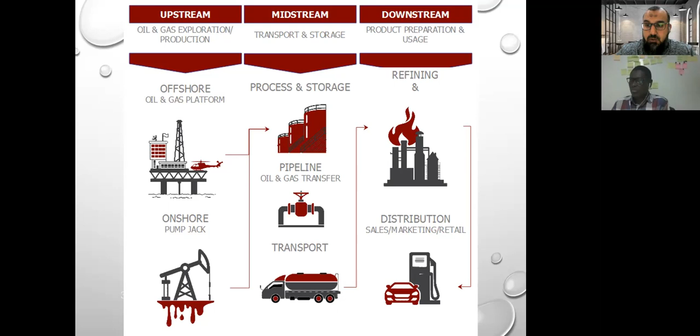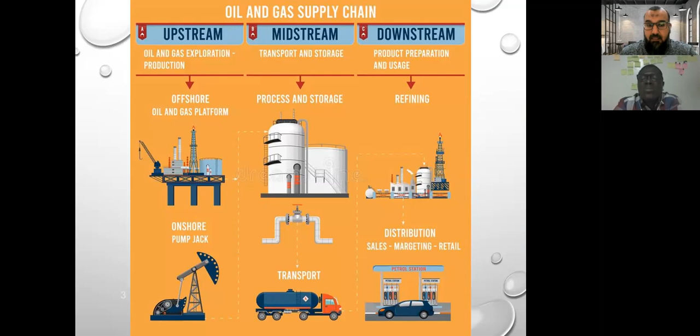Let's speak in details. This is another photo of the upstream, midstream, downstream difference. I am repeating again so that you will remember this comparison: upstream is oil and gas production and exploration, midstream is transportation and storage, downstream is usage and refining. I'm repeating myself so that everyone will remember the difference.

In upstream, we will speak today about the offshore platform and the onshore platform. Offshore, as I said, is on the sea. The onshore is on the land.

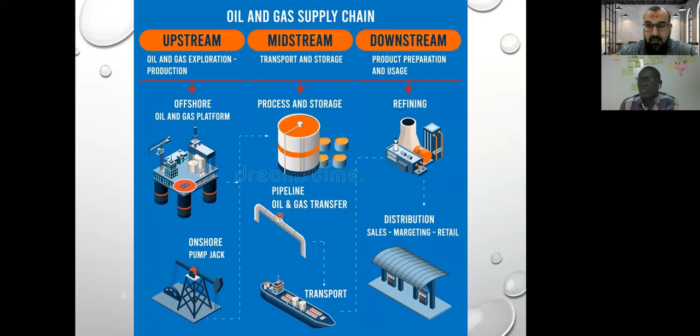So let's have some quick video. It will give you an idea about what I need to say about upstream, midstream, and downstream in oil and gas.

This is the Earth. It's really, really big. It has a total circumference of 40,000 kilometers at the equator, and a surface area of 510 million kilometers squared. And the vast majority of petroleum is found underground. So how on earth do we find it in order to extract it? Geologists can use a variety of different methods to locate oil even when it resides deep beneath the Earth's surface. The most common method of locating oil is via seismic survey. Essentially, geologists use a variety of different tools to emit sound waves, which then delve into the Earth's crust, some of which bounce back to the surface. A computer can then interpret these sound waves and create a detailed three-dimensional image of the various geological formations beneath the surface, thus providing the approximate location and amount of oil in any given oil reservoir.

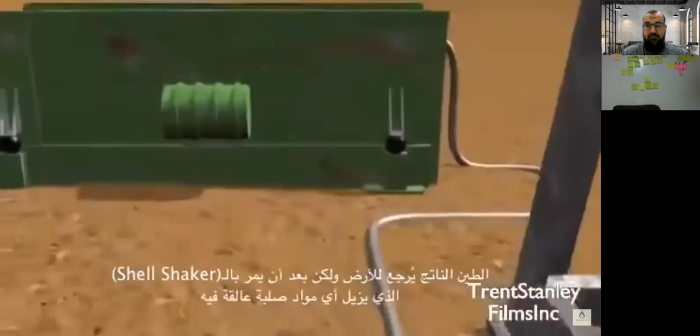As the drill bit plunges deep underground, drilling fluid is pumped down through the drill pipe to wash the rock cuttings out. The resulting mud returns to the surface and passes through a shale shaker, which removes any unwanted solids from the mud. The mud is then poured into a tank, where it is used as drilling fluid to

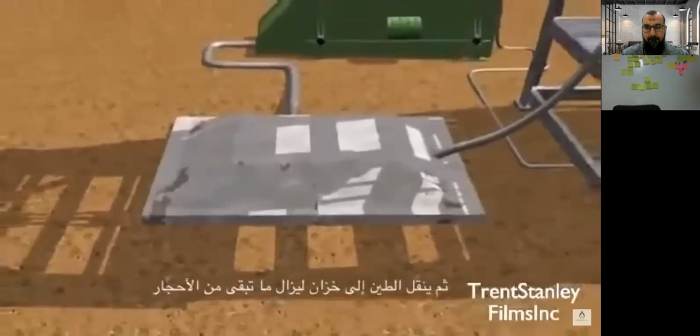remove further rock cuttings. Once the well has been drilled to sufficient depth, the walls are reinforced with concrete and steel casing, and then the drilling rig is deconstructed.

The next stage of the petroleum industry is production. In this stage, the oil is extracted from the reservoir. This is done with an oil rig. The rig's size and shape depend on...

So now I am still in the first section or sector, which is upstream. Please focus on this one. Alert, because the next step now - a video will illustrate the next step, which is upstream. Then the next step is midstream. Then the last step is downstream.

So now we are in upstream, which is onshore. This is onshore because on the land, the drilling unit has now explored the oil and started to produce oil. Now we start to produce oil from this drilling machine or drilling well. It will go to the next sector, which is midstream. Remember this. Then we will go to the downstream.

Where the oil reservoir is located, a pump jack is used. A motor turns two crank rods aided by counterweights, which are attached to a pitman arm, which is in turn attached to one end of what is known as the walking beam.

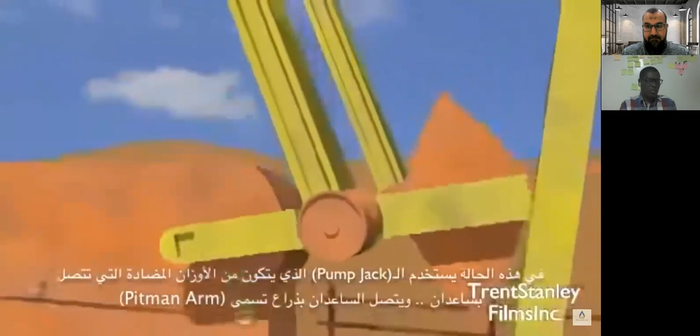The beam is centered on a pivotal point, and the circular momentum of the crank rods force it to rotate back and forth as it is pulled upon by the pitman arm.

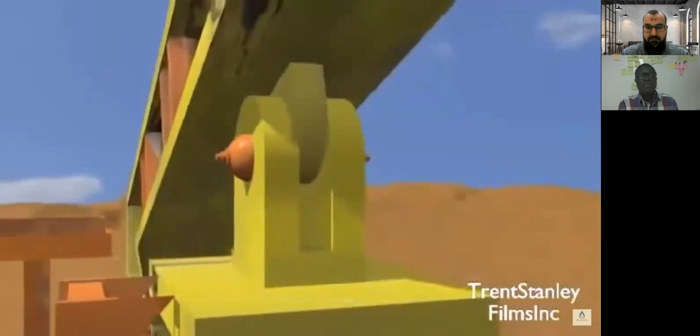Attached to the opposite end of the beam is the horse's head, and attached to that is the bridle. As the head travels up and down with the movement of the walking beam, it pulls on the bridle, which is attached to a polished rod.

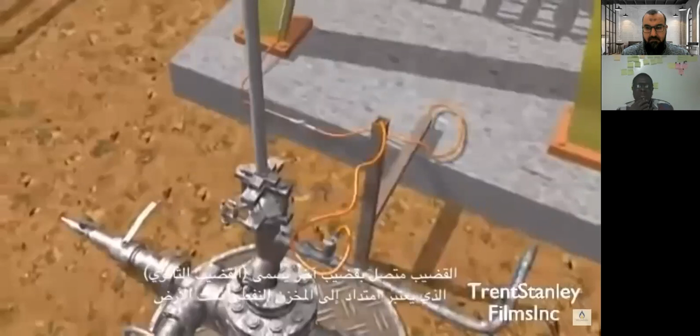The rod is attached to another rod known as the sucker rod, which extends all the way down into the oil reservoir. At the end of the sucker rod are two valves, the traveling valve and the standing valve. These valves pump the oil up out of the ground as they move up and down with the momentum of the sucker rod.

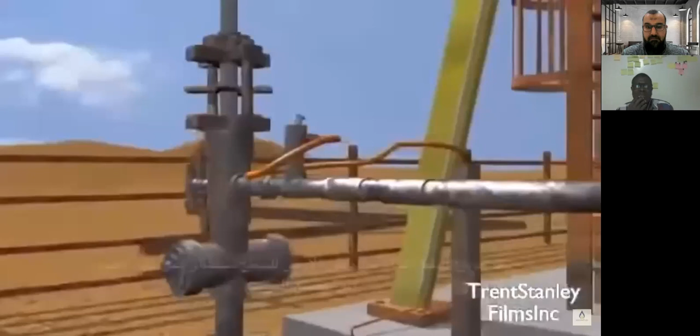Once the oil is drawn to the surface, it then travels along a small pipeline to a collection plant. This is the end of the third stage of the petroleum industry.

From the collection plant, the oil must be transported to a... So, listen, he said the oil must be transported.

Now we are in the transportation sector. Transportation, now we transfer to the next, which is midstream. We'll finish the upstream, we'll finish the exploration, we'll finish the production. They produce the oil now. They now need to start to transport the oil. So transportation is another sector, which is midstream. This is midstream. Look to this screen, to the video now. A refinery.

Midstream. The fourth stage of the petroleum industry is transportation. In this stage, the petroleum is transported from the production site. This can be done in several ways: by road, rail, sea, or pipeline.

Pipelines can be thousands of meters long and are typically made from steel with an average diameter of anywhere between 10 to 120 centimeters. The oil is kept in constant motion by regular pump stations along the pipeline and flows on average at speeds of up to 6 meters a second. The oil's final destination is the refinery, where the last stage of the petroleum industry takes place.

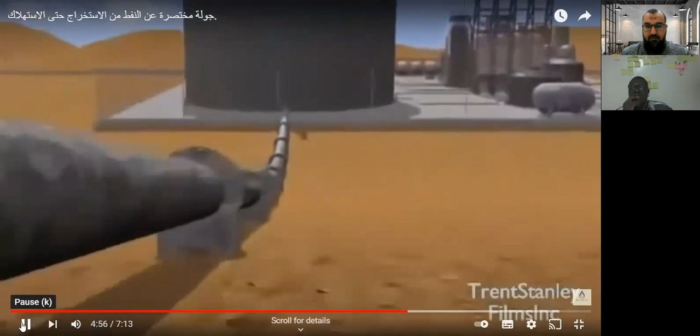So now we are going to the refinery. As he said in the video, the last stage of oil and gas extraction and production. So the last stage is refining. Refining is downstream. So this is the third sector. We start with upstream, production, exploration. Then we go to the midstream, which is transportation through this huge pipeline that you see in the video, including the pump station that needs to pump the oil to the destination.

What is the destination? Refining. Why do you need to refine? Because you need to produce some products. You need to have gasoline, you need to have benzene, you need to have kerosene, you need to have a lot of other products useful for our life, for our cars, for instance, to use gasoline or diesel or coke.

So all of these kinds of products are produced in the downstream sector, which we are now going to see in the video. This downstream video is about refining and industry and distribution as well.

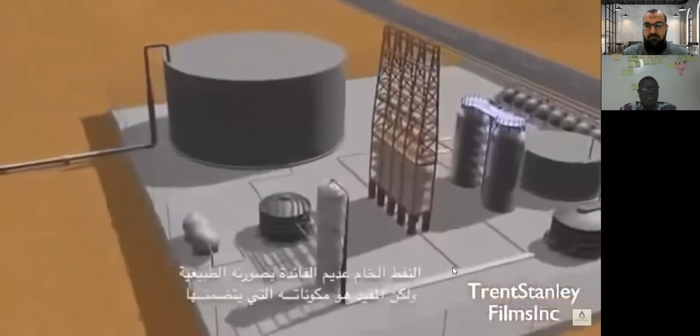The last stage of the petroleum industry is refining. Petroleum essentially is useless in its natural state. What's valuable and useful are the various components that make it up. These components all have different molecular weights and therefore have different boiling points. Petroleum companies take advantage of these different boiling points and use them in order to separate the different components.

In order to do this, the petroleum is first heated to temperatures as high as 600 degrees Celsius by pumping it through a furnace. The resulting petroleum gas is then piped into what is known as a fractionating tower, or distillation column. As the gas rises up through the tower, different components condense at different heights. A series of bubble caps then prevent the oil from falling down once it condenses.

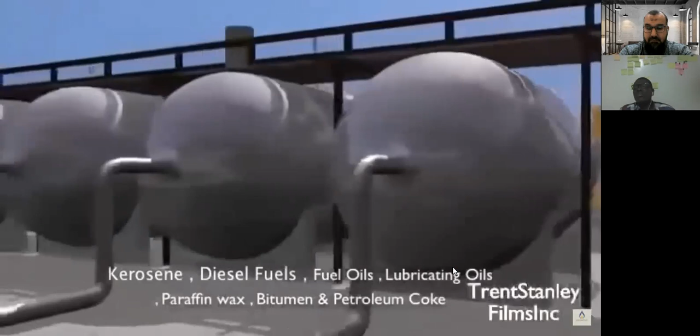The petroleum is then pumped out through pipes for further refining, such as the removal of sulfur in desulfurization units. Sometimes the heavier elements of petroleum are broken down into lighter, more useful components, using a coker or hydrocracker. The major products resulting from petroleum refining are liquid petroleum gas, gasoline, naphtha, kerosene, diesel fuels, fuel oils, lubricating oils, paraffin wax, bitumen, and petroleum coke. These products are then used in our everyday lives, such as powering our cars.

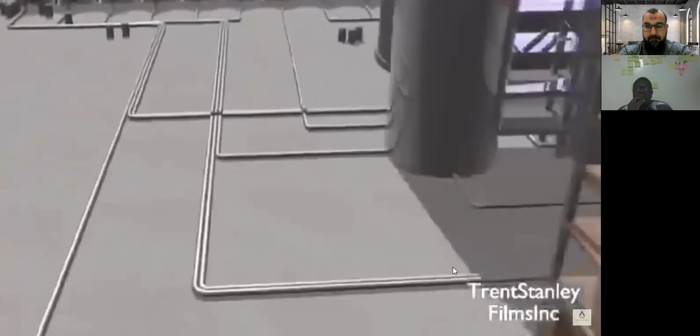Petroleum is a non-renewable resource, and so it will not last forever. It is estimated that the Earth...

So this is a small video to explain the difference between the upstream, which is mainly production and exploration, midstream, which is for transportation, and downstream, for refining and distribution. Now we will go back to the upstream sector for a more detailed explanation. As I said, the upstream has exploration and production.

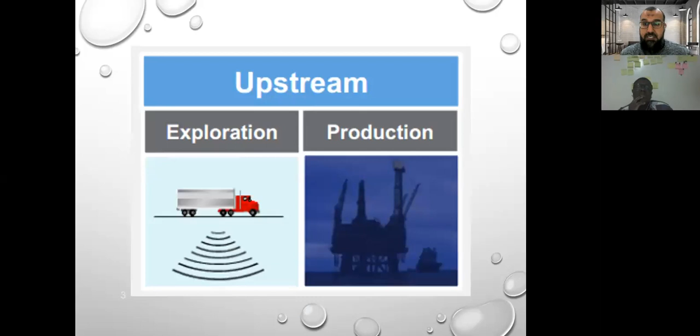In the exploration field, the people in the past used some simple features so that they could know whether there is oil in this area or not. They could notice some tar seeps or some marks from the gases in a certain location. So in the past, they noticed there is oil or gas there, so they started exploration. This is a very old method.

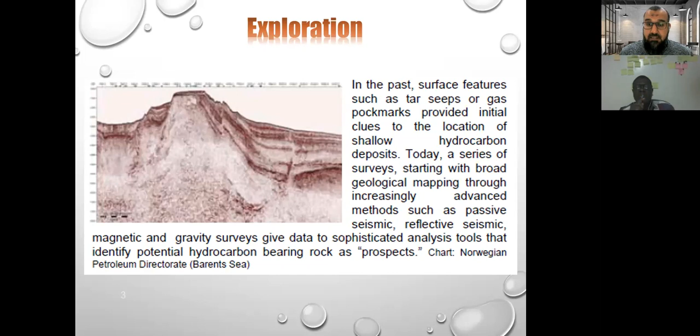However, nowadays, people with the new technology use something more advanced called seismic, or reflective seismic. What is this? It is like sounds from machines. They produce signals. Let's go to the next photo. It will give you more details about the seismic.

This is like a source of sound or signals. They produce this through air guns, and it goes directly to the deep area of the land or underneath the water to the seabed. Then the reflected sound waves will be transferred to 3D images. And this 3D image will give the geologists and all the people working in this field an idea about the condition of this area, the gas and oil, the amount of gas, and the possibility to explore in this area or not.

So this is a new technology. They use this seismic source to have signals reflected, then they transfer this to 3D images. They can then know if there is any gas or oil in this location before they start the exploration. All right.

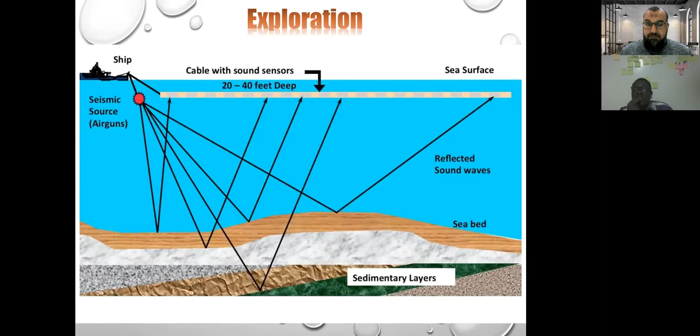Why do they need to do so? Because exploration actually costs a lot of money. Typically for offshore oil it costs about $30 million. So this is a really huge cost. Leases for the rig are typically about $200,000 on average, up to $700,000 per day. So this is too much cost. They need to lower this cost as much as they can, but that's mainly exploration. Exploration always costs them a lot of money.

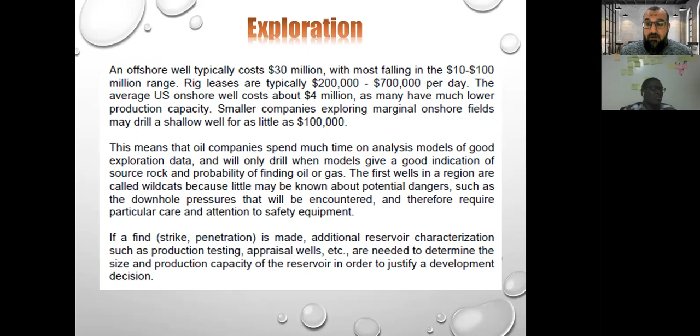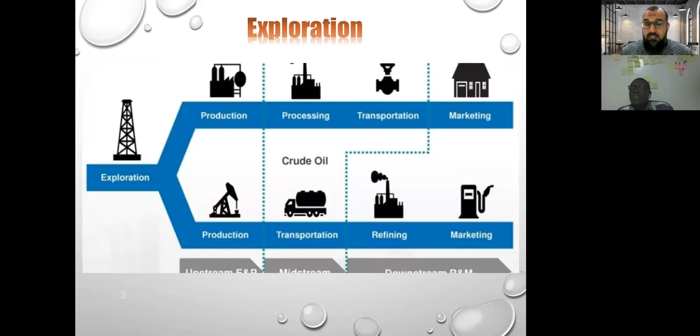That's why we know they need to do many times some analysis models of some good exploration data so that they can know exactly if there is any oil and gas in this area or not. For exploration, as I said, we have production either onshore or offshore. So for production, actually, we have many types of facilities or typical oil and gas production facilities.

We have, as I said, onshore, as it's shown in this photo. The first one is onshore. It is on the land, so it is an onshore facility for production. However, the others are offshore; from 2 to 7 are offshore platforms. And we have many types of offshore platforms. For example, the second one is a fixed offshore platform.

Number 3 is called offshore fixed self-contained platform. Number 4 is called offshore self-contained concrete gravity platform. Number 5 is called floating offshore, which requires some mooring, and this is more flexible for movement from one location to another. Number 6 is storage, shuttle or tanker. Number 7 is offshore floating tension leg platform.

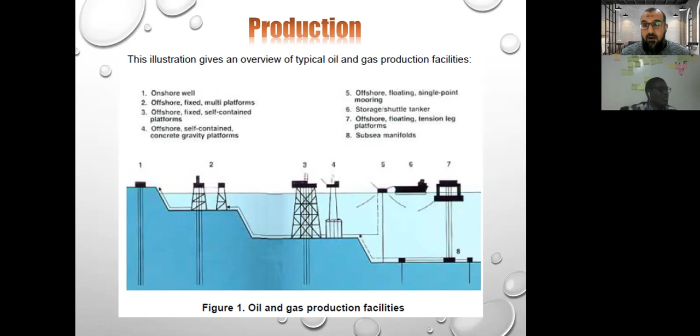And then number 8 is the subsea manifolds. These are mainly the common oil and gas production facilities, either onshore or offshore. This is also a simple diagram of the processing systems in most production facilities. In the first diagram here, you will find the production wellheads. This kind of symbol is a valve. Let me illustrate it by annotation so that you will understand where I'm speaking.

So here, this illustration is a valve, an open or closed valve. It means this is a group of valves. What I mean by valve is to open or close the flow. If it is open, the flow will pass. If it is closed, the flow will stop. Like the same valve in your house, in your kitchen, in your bathroom, or in the toilet.

When you open it, the water will flow. If you close it, the water will stop. This is the same methodology. This is the symbol of the valve. So in the production area, the first is the wellhead, a lot of groups of valve manifolds. They call it manifold. Why manifold? Because there are groups of valves. They call it manifold for testing and production.

Then the second stage in this production facility, they will go with some separation to separate the produced oil from unwanted material like water or gases. So there is some separator to separate the oil from water or from gases. So the gases go to this gas compression, from high pressure to medium pressure to other pressure, and the water goes to the next step. And also we'll have some symbology about the pump, like the water injection pump and gas compression injection system.

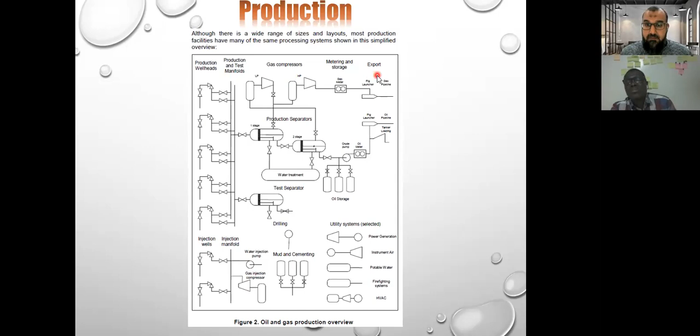So this is typically the plot diagram or flow diagram of the production facility, starting from production wellhead, testing manifold, gas compression, metering and storage, and then export. All right. So the next slide speaks in a little more detail about production. Then also, as I told, there is something called gas oil separation, which means GOSP. It is very common in production in the upstream area.

In the upstream field, you will find a lot of terminology called GOSP. This is a very common small facility like this, what you can see on the screen down. GOSP means gas oil separation plant. So this is to separate the gas and oil from what? To separate the gas and oil from each other. So you need to separate gas from oil. So you will go to this GOSP, gas oil separation plant, to separate the oil from the gases.

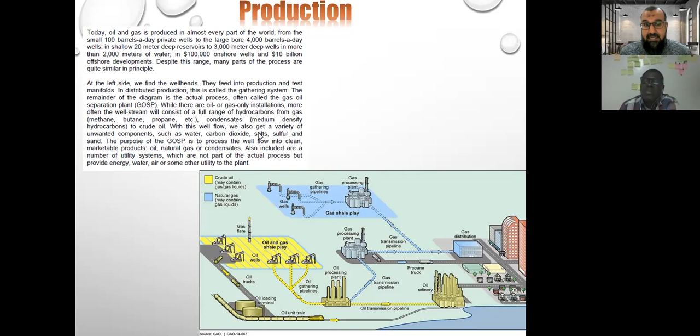This is again a big picture of the GOSP to separate gas from oil. And actually, this is mainly the gas processing plant, and this is the oil processing plant. The gas goes to the gas processing plant for further transport and processing, and the oil goes to the oil processing plant for further processing. So the oil will then immediately go to the oil refinery because it is pure oil, and the gas will normally go to gas distribution.

So the gas and oil are now separated. The oil is going to the oil refinery and the gas is going to gas distribution. And here all this is an onshore drilling well, and this is on the land, so it is onshore. If it is on the land, it is onshore, as we described.

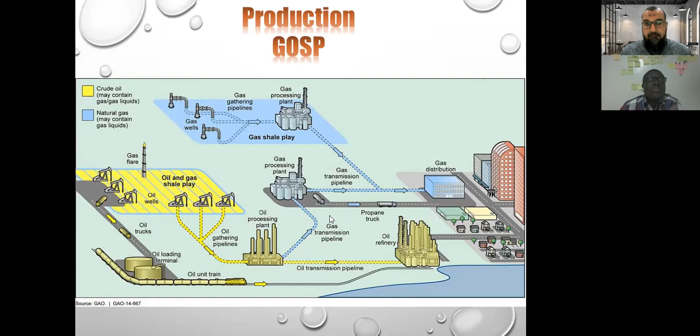Okay, now in the production, as I said, we have onshore and we have offshore. The onshore, as I said, is on the land, so any manifold or any facility or any area or any oil being explored on the land, they put the facility on the land, they put the rig on the land, they start the exploration and production on the land. So they call it what? They call it onshore because they started on the land.

And this is all kind of oil rig. You see here, let me also have annotation to be more clear. You see, this is oil rig. This is oil rig, this is oil rig, and this is oil produced well here. This is well. So this oil rig and this oil rig, all of them are onshore.

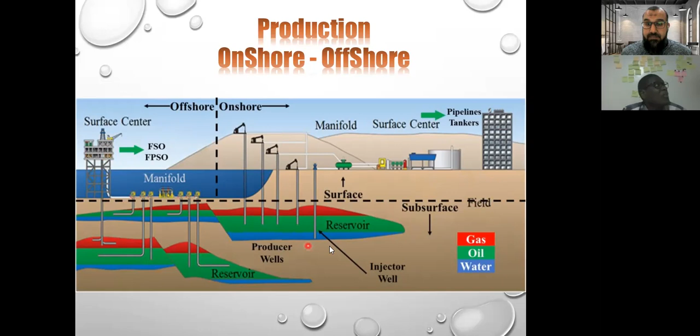Now let's have some idea about the onshore plants. This is the onshore drilling unit. Onshore means it is on the land. We are seeing now land. So actually this onshore production is economically viable from a few dozen barrels of oil a day and upward. Oil and gas is produced from several million wells worldwide. So the gathering network can become very large, the production from thousands of wells, several hundred miles apart, feeding through a gathering network into a processing plant.

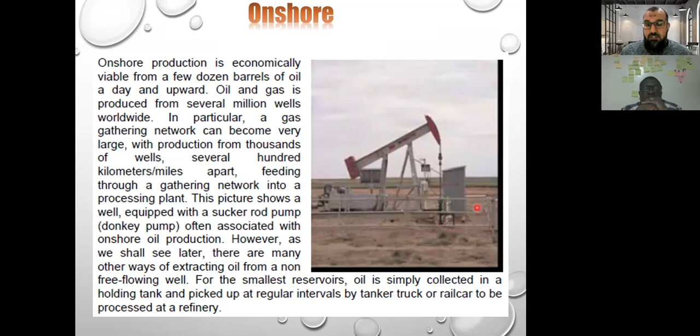So this picture that you can see on the right screen shows a well equipped with a sucker rod pump. There is a pump there, and it's called a donkey pump, often associated with onshore oil production. So this is onshore oil production.

So in some unconventional areas, you will find some very heavy crude and tar sands. This is very heavy, so it's not easy to extract heavy crude and tar sands. So it becomes economically higher in cost, and it costs the drilling companies more to extract the heavy crude. Because the heavy crude is heavy in its material. It's not light, it's not sweet, so it is very heavy. It requires a lot of heating to be extracted.

The same for the tar sands, which have lost their volatile components and are strip-mined or can be extracted with steam. So a lot of methods are used, and this depends on the hydrocarbon components in the crude oil.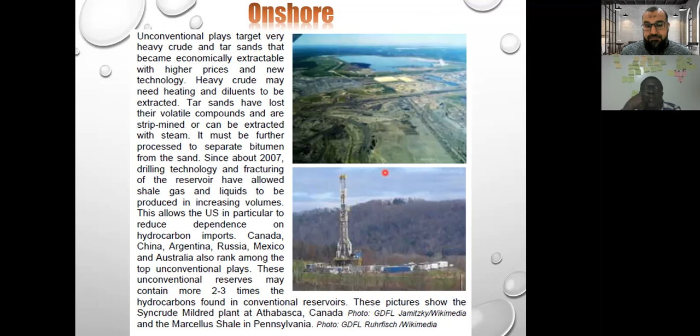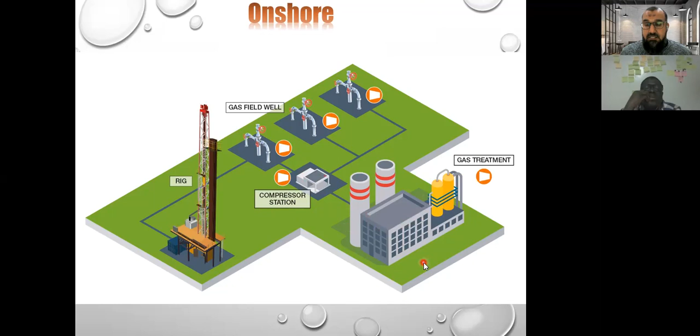Okay. What about offshore? As I spoke, we have onshore, then we have offshore. The offshore is actually any oil and gas facility which is on the sea, not on the land. It is on the sea. So we have very different platforms and very different areas of platforms or common offshore structures.

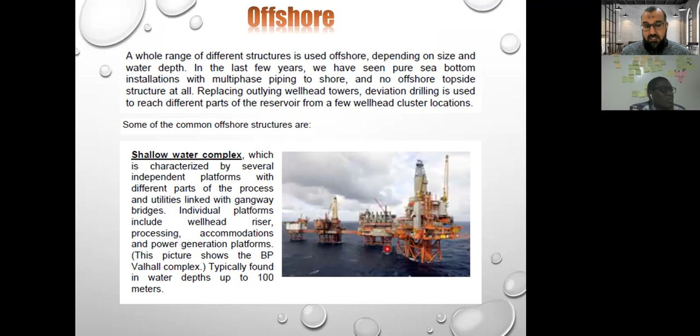This is actually not in the shallow water. It's deeper. It can reach 500-meter depth. There is also another type of platform. It's called compliant towers. It's mainly like the fixed type of platform, but they have some concrete foundation. So this is to extend the platform upward. But this kind of tower is flexible, unlike the rigid legs of fixed platform.

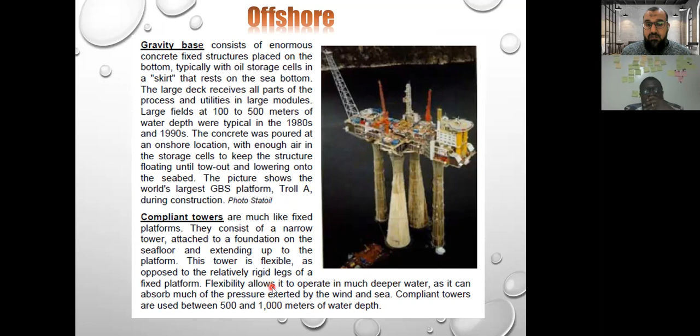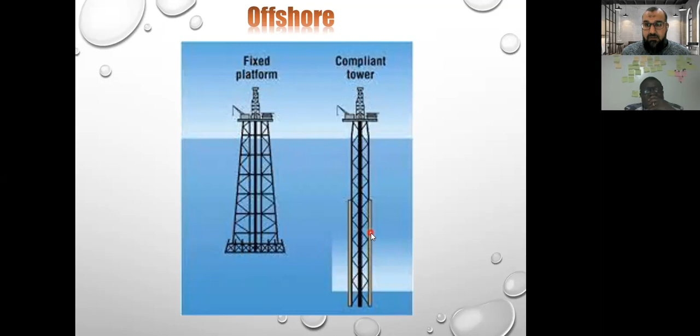So let's see a photo of this compliant tower. This is a compliant tower. It's actually going deeper than the fixed platform. The fixed platform can reach up to 500-meter depth. However, the compliant tower goes deeper inside the water. If the sea becomes more deep, then you need to go not with a fixed platform, you need to go with floating production. This floating production is not fixed, it can float, so it will require deep water.

The common terminology of this floating production, they call it FPSO. This is very common in offshore. They call it what? FPSO. Floating production, storage, and offloading. The main advantage of this floating structure is that it is standalone. Standalone structures don't really need any external infrastructure like pipelines or storage. The crude oil is then offloaded to a shuttle tanker, and this shuttle tanker can transport the crude oil to another area, depending on the production.

These FPSOs currently produce around 10,000 to 200,000 barrels per day. Barrels is the unit of the volume of the oil. So they can produce up to 200,000 barrels per day. This is typically a tanker type. So remember that if the sea depth increases and it becomes deeper, then it is better to use a floating type platform for the offshore wells.

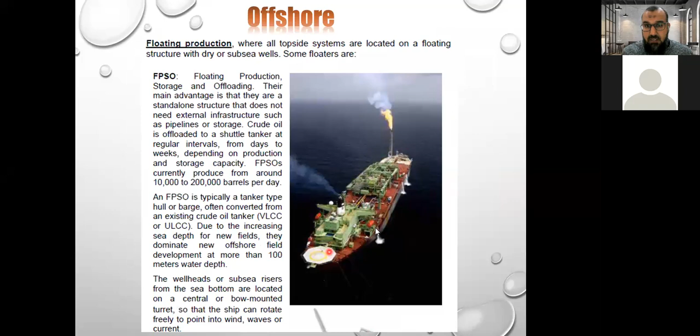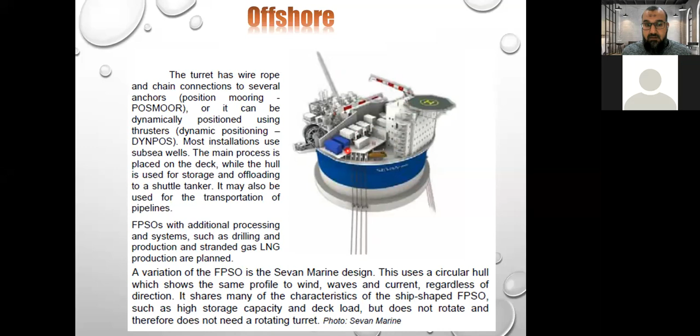Here, this is underneath the floating rig. The turret has wire rope and chain connection to several anchors. This allows dynamic positioning and mooring. They can be flexible. It can move and rotate. So imagine this structure is underneath this huge FPSO tanker, with mooring and dynamic positioning. For what? For easy movement, turning, and relocation to another location.

We have also another type of platform. They call it the tension leg platform. This actually reaches depths of about 2,000 meters, the depth of the seabed under sea level. So the depth of the sea here reaches 2,000 meters, 2 kilometers actually. It is very deep. So they use this kind of structure in very deep water. They call it tension leg platform.

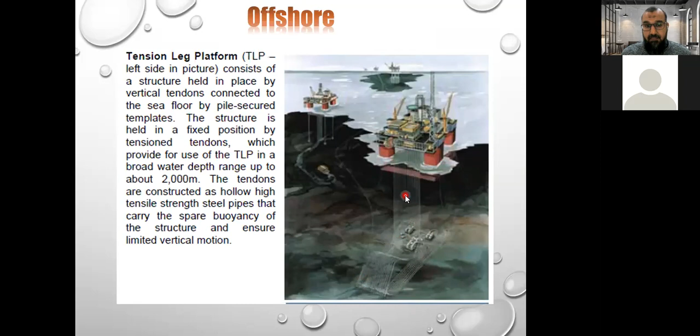The other type, they call it semi-submersible platform. This kind of offshore platform is actually a similar design, but without what? Without mooring. This permits more lateral and vertical motions. So they can move vertically, they can move laterally as well. So they have this kind of flexibility to go up and down. Depends on what? Depends on the sea current and the winds. So they can go up and down, and it depends on the well also. If the well requires it, they can have this kind of flexibility.

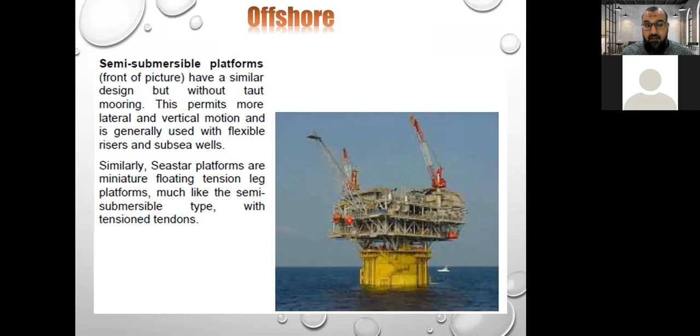The other type is called spar. This is the spar platform. It consists of a single tall floating cylinder, supporting a fixed deck, and this cylinder doesn't extend all the way to the seabed. So this is also required in deep water. It reaches to 3,000 meters depth of water.

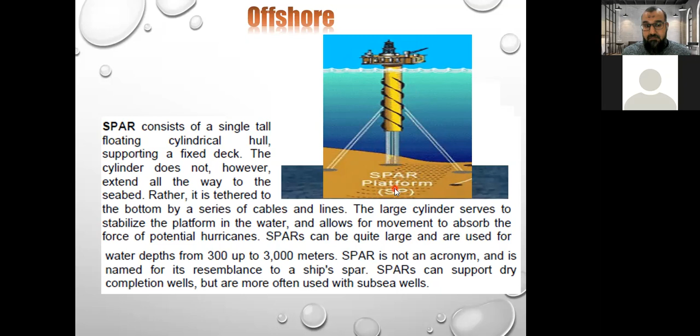Other facilities or systems offshore we call subsea production systems. These subsea production systems are mainly for wells located on the seafloor, as opposed to the surface. So in the floating production system, when we need to extract petroleum from the seabed, we need to have many production systems on the subsea. And for transportation purposes, if you want to extract oil and transport it to another location, you have to have some undersea pipelines and risers.

This is the undersea pipeline. Undersea pipeline for what? For gas transportation, to transport gas from one location to another. So this gives some flexibility to the system, so that when the platform is on the sea, they have some other subsea system which consists of pipeline, as you see here, and structures, connected together to transport these extracted gases from one platform to another, or to another facility or another plant for more processing.

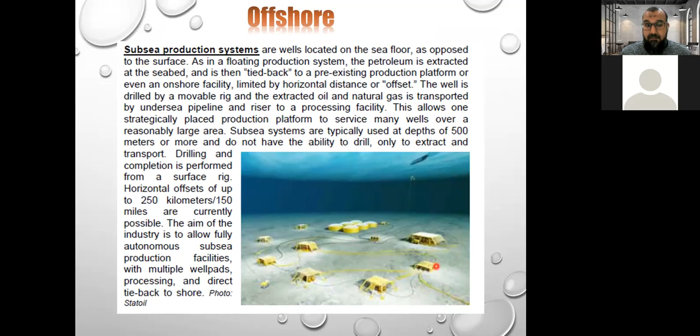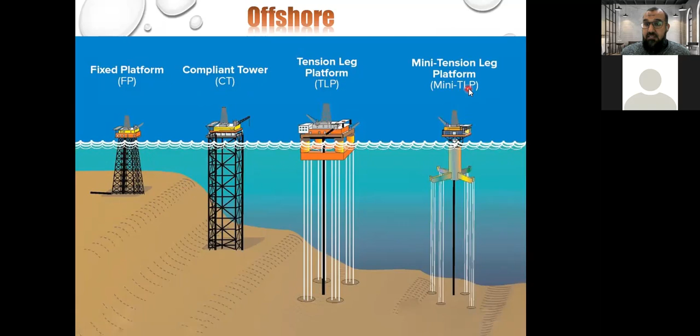This is a comparison between the different types of offshore platform. Fixed platform, as you see here, is mainly in shallow water. So the depth of water here is not very deep. If you go deeper, you need a different type of offshore platform. If you go deeper, you need this kind of compliant tower first. Then if you go deeper, you will use a tension leg platform. If you go even deeper, you use a mini tension leg platform, like this type.

Then if you go deeper, you will use a semi-submersible platform. This can reach up to 2,000 meters, and also up to 3,000 meters. For deep water, you can also use a spar platform. As I said, you can use a floating production system. You can use a floating FPSO with a shuttle tanker. You have the shuttle tanker, and the FPSO, floating production storage and offloading. You can use this in deeper water.

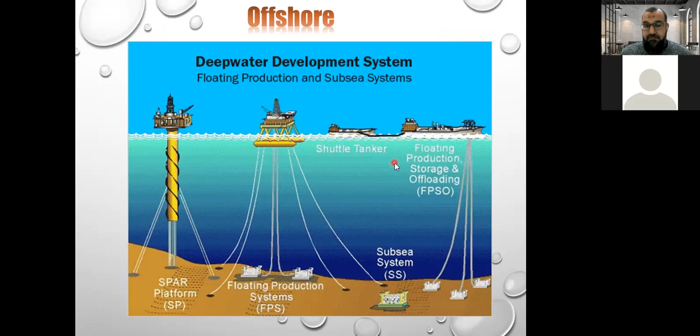Let's see a video that can explain more details about this.

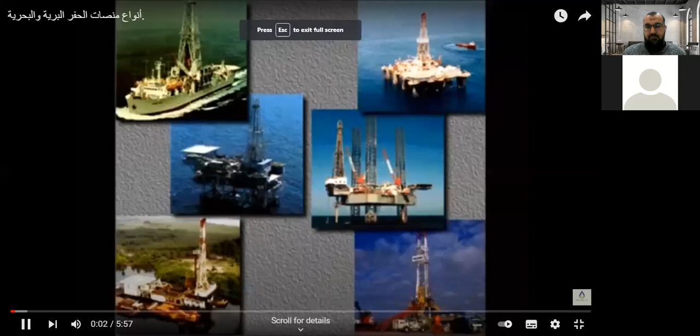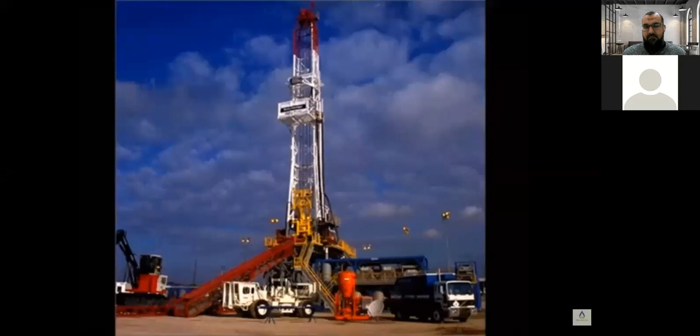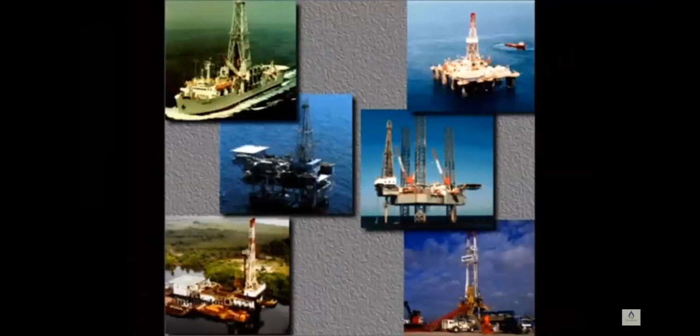Drilling rigs like these bore or drill holes into the earth. They work both on land and offshore. Some are big and some are relatively small. Big rigs drill very deep holes, 20,000 feet, 6,000 meters or more. Small rigs may only drill to a few thousand feet or meters. People in the oil industry group rigs into 6 basic types: land, jackup, platform, submersible, semi-submersible, and drill ship.

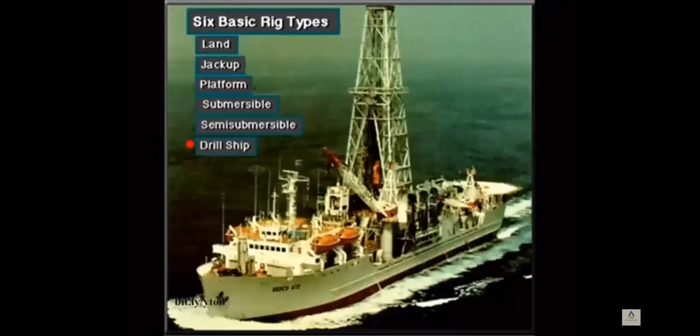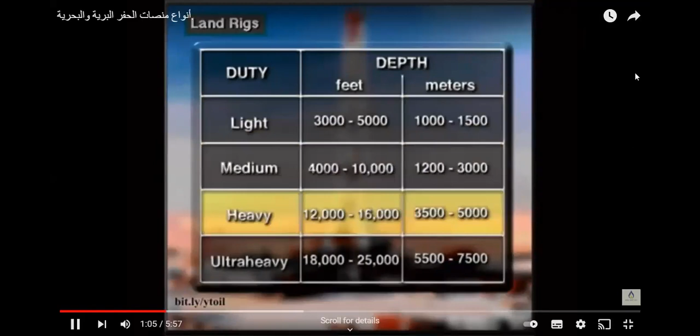A land rig drills on dry land. They're the most common rig. Light-duty rigs drill holes from about 3,000 to 5,000 feet deep, or 1,000 to 1,500 meters. Medium-duty rigs drill to depths ranging from about 4,000 to 10,000 feet, or 1,200 to 3,000 meters. Heavy-duty rigs drill holes from about 12,000 to 16,000 feet deep, or 3,500 to 5,000 meters. Ultra-heavy-duty rigs drill holes from about 18,000 to 25,000 feet or more, 5,500 to 7,500 meters or more.

Crew members can move land rigs on trucks, tractors, trailers, barges, helicopters, heavy rolling gear, skids, and, in rare cases, specialized air-pressurized equipment. Small, light-duty rigs are pretty simple to move. Ultra-heavy land rigs can be difficult to move.

A jackup rig drills offshore wells. It has legs that support a deck and hull. When positioned over the drilling site, the bottom of the legs rest on the seafloor. Jackup rigs can drill in water depths ranging from a few feet or meters up to more than 400 feet, over 120 meters.

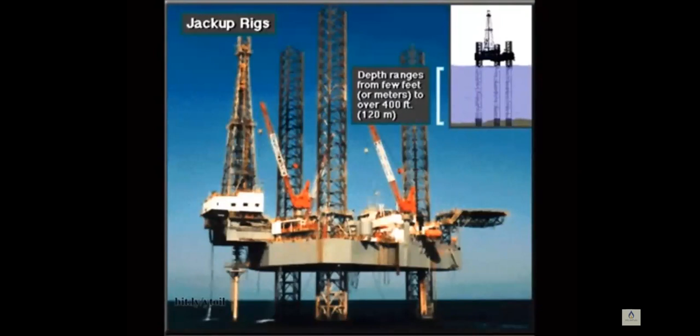Boats tow a jackup rig to a location with its legs up. Once the rig-up crew gets the legs firmly positioned on the bottom of the ocean, they can adjust and level the deck and hull height.

A platform rig is an immobile offshore structure. That is, once built, it never moves from the drill site. Companies drill several wells from the platform.

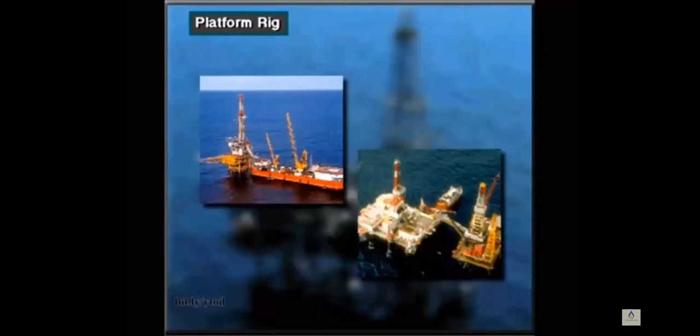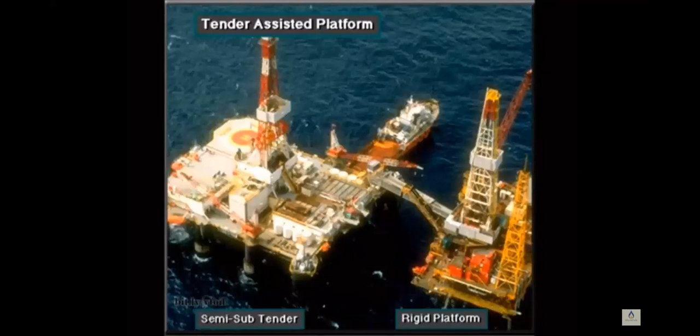Platform rigs can be tender-assisted rigs. The tender floats next to the rigid platform, which is firmly pinned to the seafloor. Many platform rigs do not have a tender. They are so large that they are self-contained.

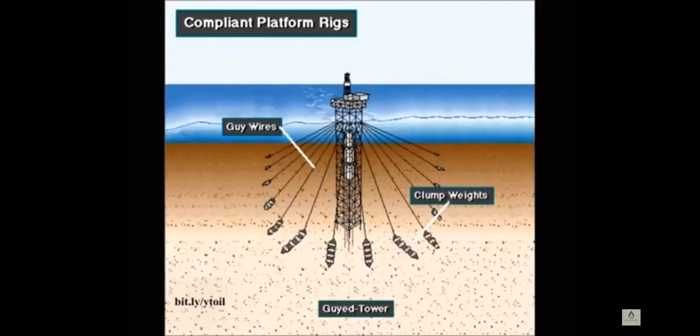Big platform rigs include the steel jacket platform, the caisson type, and the concrete gravity type. In deep water, rig builders have to make platforms that yield to water and wind movements. Two compliant platform rigs are the guyed tower and the tension leg.

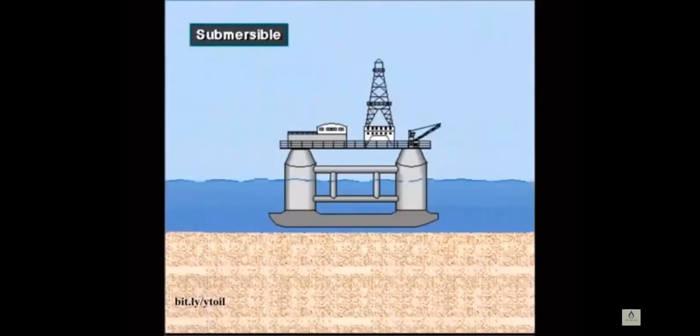A submersible rig rests on the seafloor when it is drilling. Workers flood compartments that cause the rig to submerge and rest on the bottom. When ready to move, workers remove the water from the compartments. This makes the rig float. Boats can then tow the rig to the next site.

Rig builders design submersibles to drill in shallow water and in water up to about 175 feet deep, a little over 50 meters. Submersible drilling rigs include the posted barge submersible, bottle-type submersible, and the Arctic submersible.

A semi-submersible rig is a floating offshore drilling rig. It has pontoons and columns. When flooded with water, the pontoons cause the unit to partially submerge to a predetermined depth. The working equipment is assembled on deck.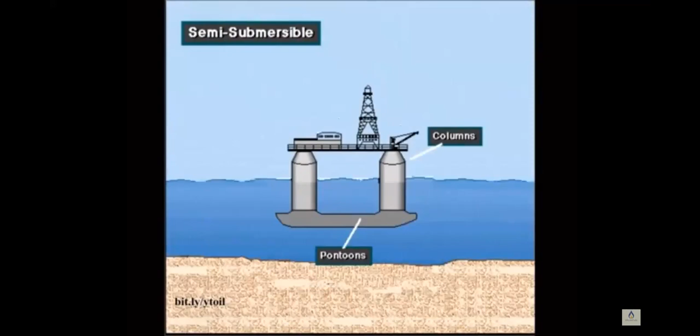On the drill site, workers can either anchor the rig to the seafloor or use a system of thrusters and positioners to keep the rig over the hole. Here, they have it anchored. Crew members mount the wellhead and blowout preventers on the ocean floor. Special hollow pipe, called riser pipe, connects the top of the blowout preventer to the rig.

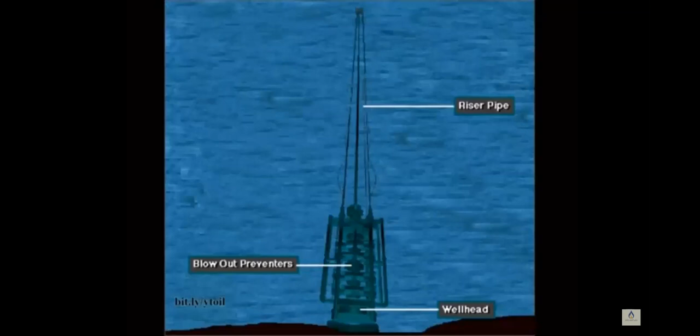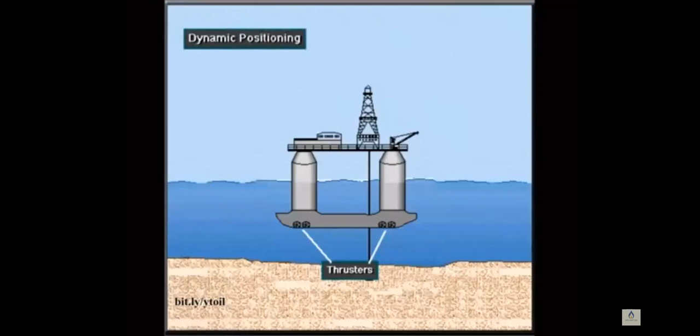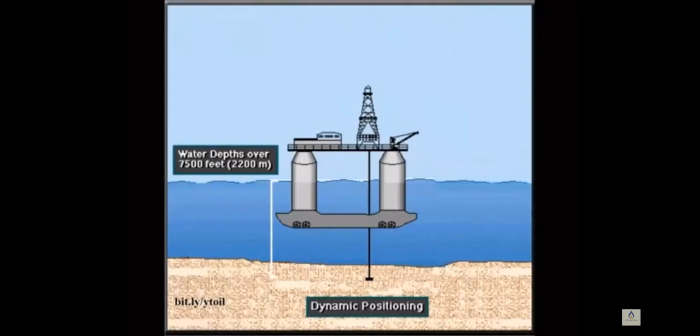In some cases, the crew uses thrusters to keep the rig over the hole. Called dynamic positioning, the thrusters, which are connected to an onboard computer, keep the rig in position. Some dynamically positioned semi-submersibles can drill in water depths of more than 7,500 feet, or over 2,200 meters. When keeping a rig over the hole, drilling crews use the term on station.